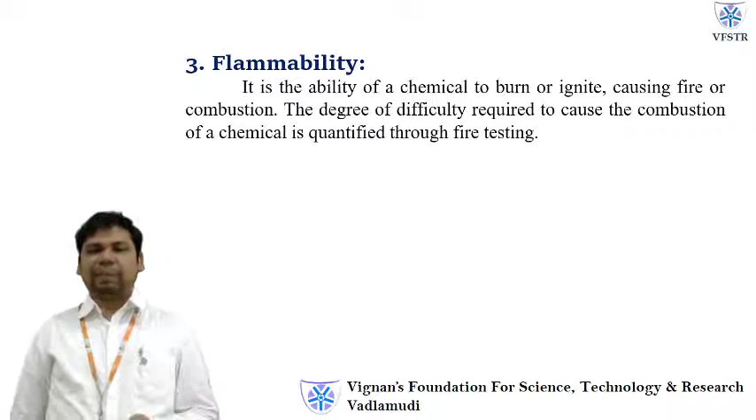Corrosion. As I mentioned about oxidation, here also it's the same thing. In the earlier topic we read about corrosion resistance. For example, when iron is exposed to seawater or the environment, it reacts with the water particles present in the environment and forms an iron oxide layer called rust. Rust formation is called corrosion. But our materials always require corrosion resistance, meaning rust formation does not happen. But the question here, as a chemical property, is which materials are corrosive.

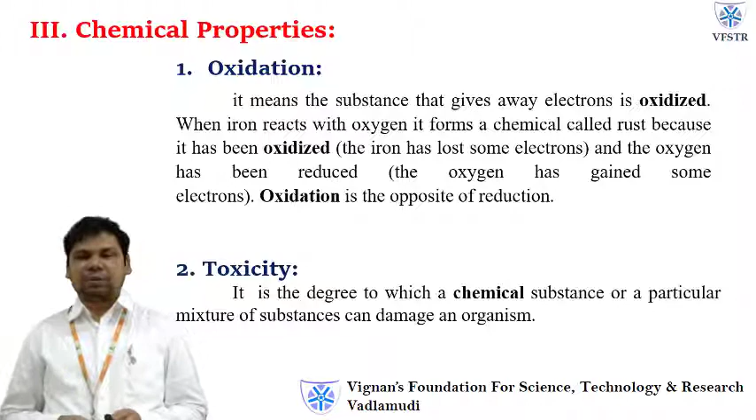So in the chemical properties, once again I will repeat, the four properties I am talking about here: one is oxidation, toxicity, the third one is flammability, and the fourth one is corrosion.

Now we'll talk about a different one, manufacturing properties. In industries, when materials are used, they will ask what properties they have. One of the properties is casting. What do you mean by casting or castability? In casting, the material is heated and becomes a liquid molten state, and this molten liquid is poured into molds and given some time to solidify. So the first step is heating the material into liquid state, then pouring it into a mold and waiting for solidification, converting liquid to solid. Finally, the finished product is nothing but a replica of the mold. That process is casting, and these are casting products.

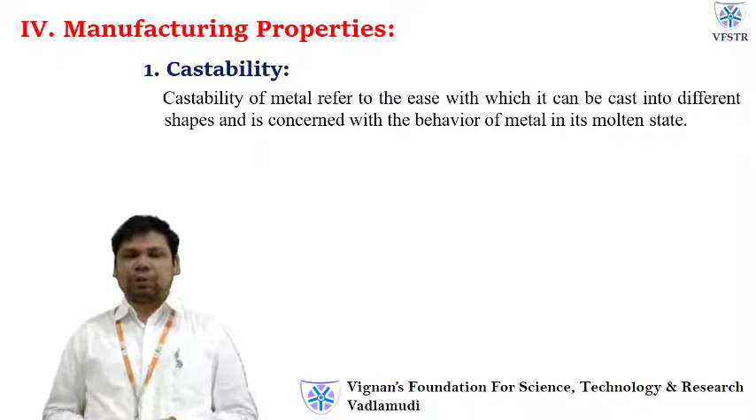Now, to decide which material is good for casting, the question is castability. Every material has a different castability nature. If it has good castability, the material in the liquid molten state is easy to move, and it is recommendable for that type of production. Similarly, machinability. Some materials are very easy and very good for metal cutting actions.

Say I have taken some material, and I have to remove some material here to maintain prescribed dimensions. I want to cut it. Whenever you are using a machine, the machine tool is going to cut. If it has good machinability property, then it is very easy to cut and make into different sizes and shapes comfortably. But some materials are very hard, so very difficult to work on.

So the question comes here, what about its machinability property? And this castability and machinability come under the manufacturing properties. Keep it in mind. Similarly, weldability: the name itself is weldability, the ability of a material to be good for the welding process. It is not possible for all materials.

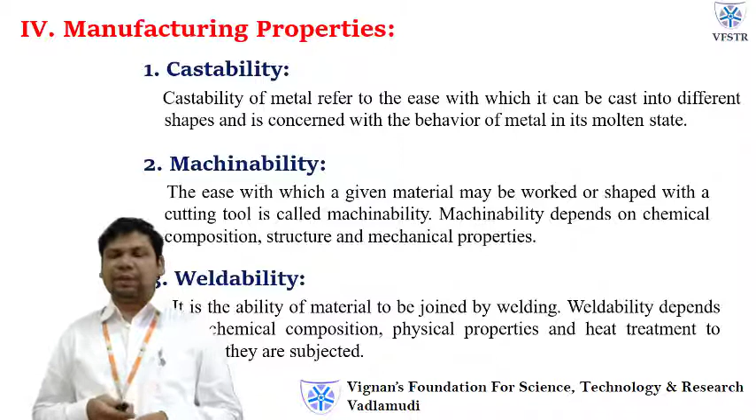Welding is nothing but a permanent joint. We give some type of heat energy. That heat energy melts at a particular localized spot and joins those two metal plates. So this is called general welding. Now here the question of weldability comes. Is every material welded similarly? No. Similar welding is not possible. A similar technique is also not possible. So those that are good for welding operations are said to have weldability properties.

Good. So the next one, electrical properties. So far I have completed chemical, mechanical, and manufacturing properties, about three. The next one is the electrical properties. Here the main field is electricity, the flow of current. Even if you don't know anything, you can generally say there is the flow of current, the resistance, the dielectric strength. You already studied these, I am just trying to remind you.

First one is conductivity. Conductivity is defined as the ability of a material to pass electrical current. That's it, its conduction nature. The current flowing means the electrons are flowing, which means it is a good conductor. Copper is a good conductor, and it is measured in per ohm per meter. Similarly, there is resistance. Resistance, as the name itself says, is completely opposite to conductivity. The resistance to the flow of electrons is called resistivity, which is measured in ohm-meters.

The next one, thermoelectricity. Here, thermo means heat. I am talking about two dissimilar metals joined together, maintaining two different junctions at two different temperatures. What will happen? It is nothing but a thermocouple in nature. So different types of materials are chosen for this thermocouple nature. The material is good for a thermocouple because it has good thermoelectric nature.

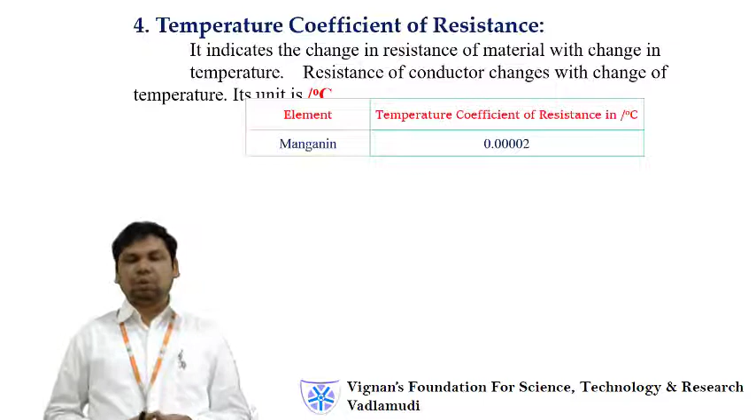The next one, temperature coefficient of resistance. I said resistance opposes the flow of current, but that resistance is also affected by temperature. The resistance of the material changes with temperature, which is measured per degree centigrade. For example, if I choose manganin from the table, it has 0.00002 per degree centigrade. That means for every degree centigrade, this much resistance changes. Every material has some value.

And finally, the last electrical property is dielectric strength. This is the ability of a material to withstand high voltages. Where there are high voltages, these materials are recommended to operate without any damage or failure of the systems. It is measured in kilovolts per centimeter. Materials with good dielectric strength are mostly used in transformers and power stations to transfer power. So this is it for the electrical properties.

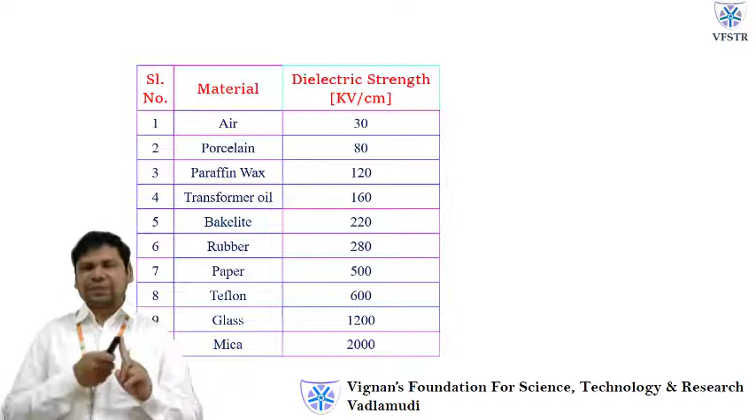And here is a table which gives the dielectric strength for different materials. The material may be air, glass, mica, or rubber, and how much the value will be. So don't think that electrical means only one property, one material. It's not like that. For each material, it is possible to address its physical, chemical, mechanical, manufacturing, or maybe optical nature. All these things we have to address. But for simplicity, we address only what your application requires.

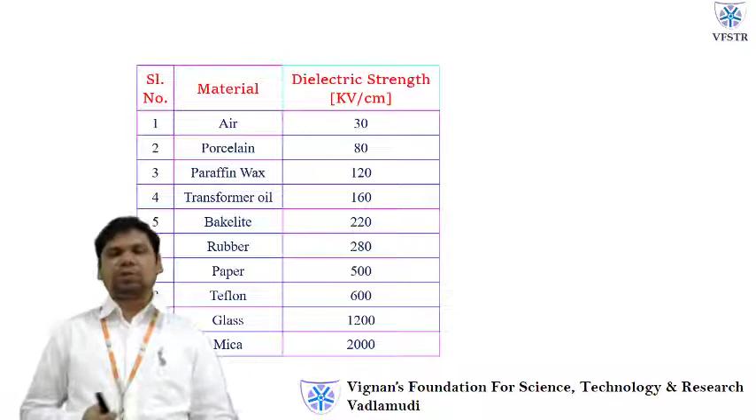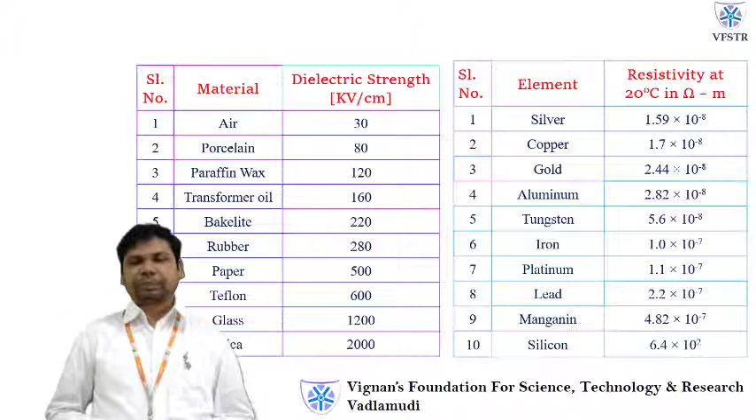The next one, the last category of the material properties, is the optical property. The name itself mentions optics. So the optical property of a material is nothing but the interaction with electromagnetic radiation in the visible form.

If you observe the electromagnetic waves from this diagram, they are available in different forms: radio waves, microwaves, infrared waves, visible waves. Visible waves means those waves which you can see. Radio and microwaves are not visible to us. Their frequency is different, their wavelength is different. So different types of waves are present, and the list is shown in the diagram.

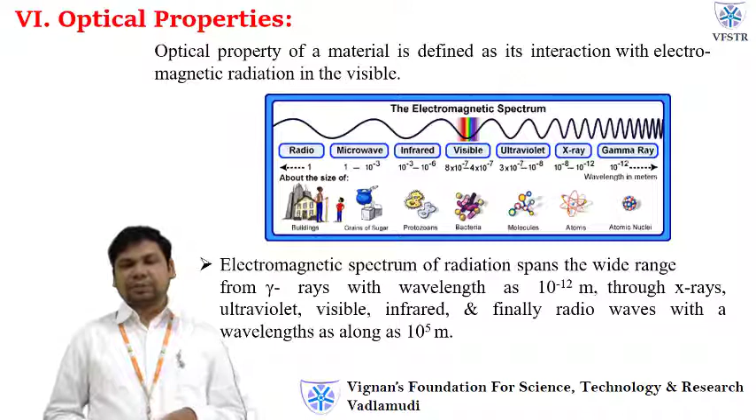There are gamma rays, X-rays, ultraviolet rays. Each one has a different frequency and a different wavelength. Now, we are talking only about the optical property here. In the electromagnetic spectrum, the radiation spans a wide range, from gamma rays with wavelength 10^-12 meters, through X-rays, ultraviolet, visible and infrared, and finally the radio waves, which have 10^5 meters of wavelength.

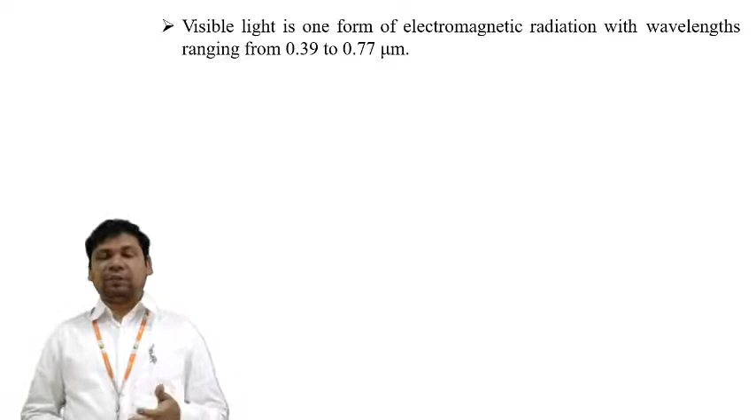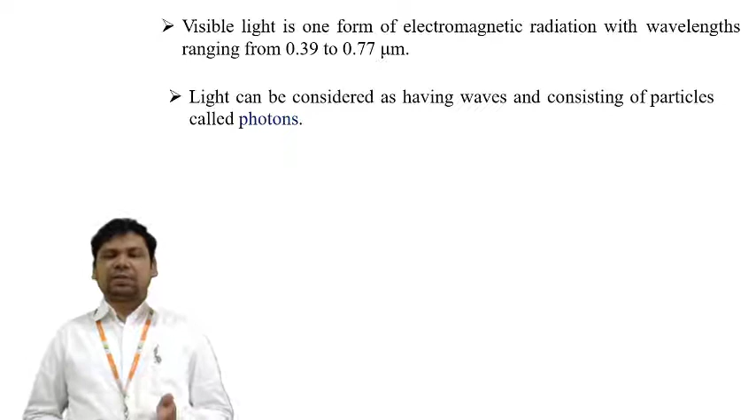Now, one important point: the range of wavelength for visible light is 0.39 to 0.77 micrometers. The main thing is light can be considered as waves and as particles, which we know are called photons.

When light rays come in contact with the material, there are three possibilities: transparent, translucent, or opaque. If a material allows the light rays through it, it has a good transparent property. Translucent means it allows the rays, but only partially; some part goes out. That is called translucent.

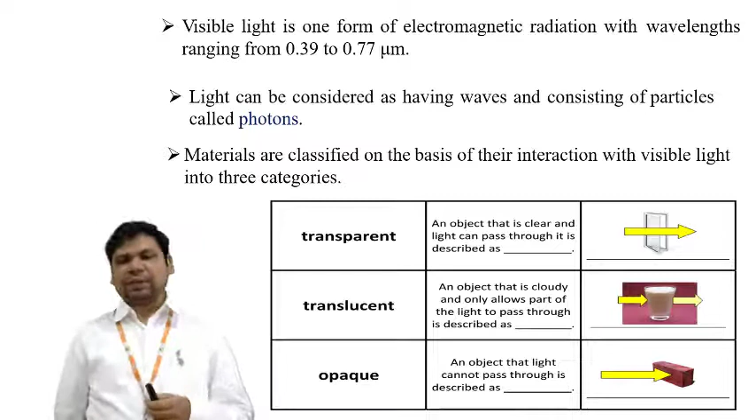Opaque means light is not possible to go through. Like the brick shown here, which resists the flow of light. No light can transfer inside the material. Those are opaque. So these three are also properties.

Here I'm giving you a small exercise. This diagram shows opaque, translucent and transparent. The question may be: what are the examples for each? From the diagram, what do you understand? Try to give the examples.

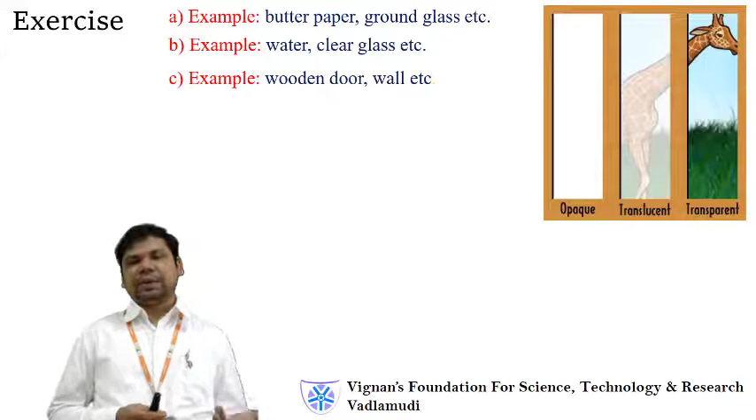Butter paper, ground glass come under what type of property, of the three conditions: opaque, translucent or transparent? For example, a wooden door, a wall, which category? Water and clear glass come under what property? Not only these three properties, we'll talk about some other properties now.

One is absorbability. The name itself is absorb. Light can be absorbed inside the material. Almost the same amount that is incident on the material is absorbed; that is called absorbability. Transmitting, the name itself mentions transfer: simply passing the light rays to the other side. It's called transmitting.

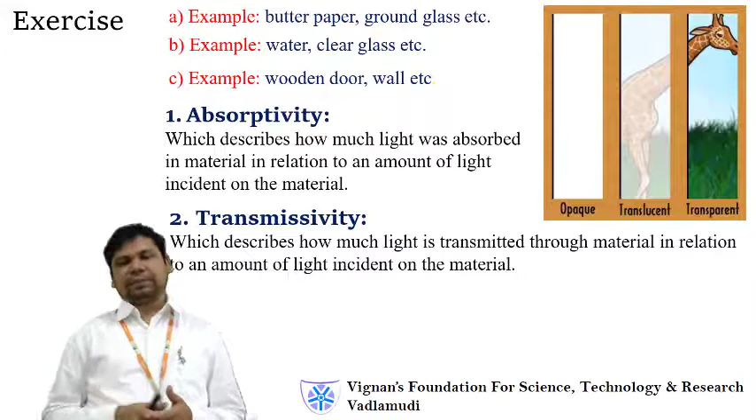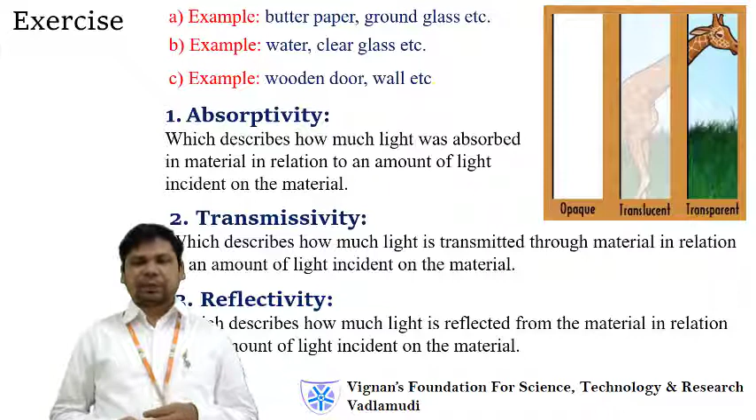The next one is reflection. Reflection is about the material reflecting rays in another direction. Whereas transmissivity means light goes through the material, reflection means it is reflected towards the other side. So these are the three properties. Another one, refractive index.

So the index indicates the scale, and every material has this refractive index measured. It is defined as the ratio of the velocity of light in vacuum to the velocity of light in the metal or material. This is called the refractive index.

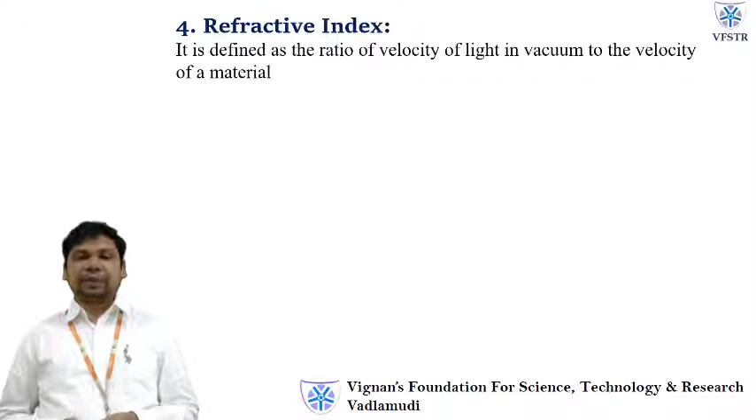Similarly, emissivity. It describes how much light is radiated or emitted from the material in relation to that radiated by a black body. Of course, the temperature condition will be the same. That means emissivity is measured with reference to black body radiation. So that is called emissivity. It is a ratio, a constant.

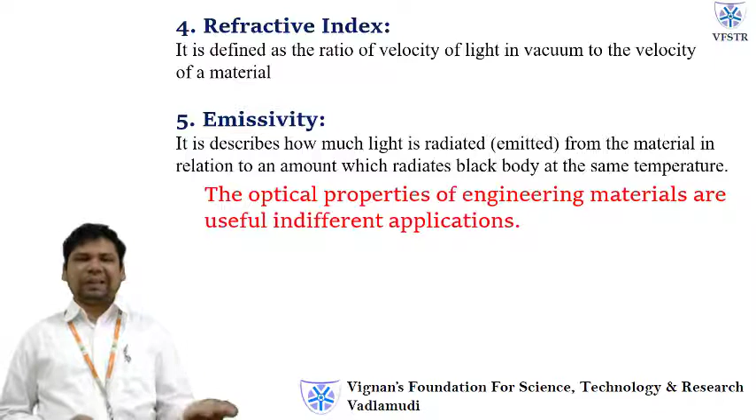So here, when you're talking about all these fields, maybe in mechanical, you can use any applications, like from an automobile point of view. So physical, everything will come. Similarly, the optical properties also play a major role. And here I'm simply giving some examples of that.

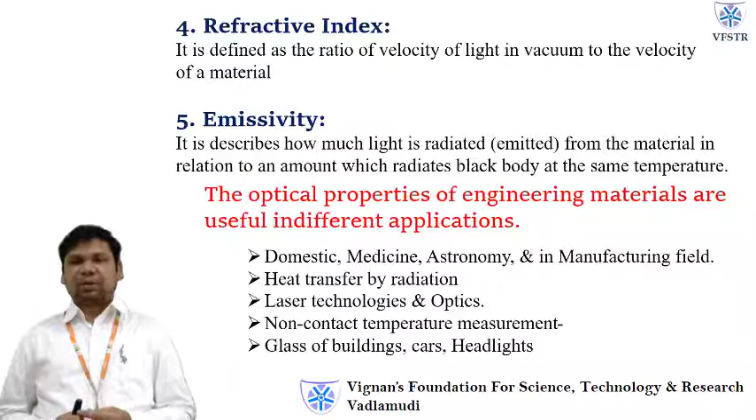So whatever you are using in the domestic, medicine, or manufacturing field, heat transfer, radiation, optics, laser technologies, there may be non-contact temperature measurement. That means for temperature measurement, no need to contact that body. With these light absorbing properties of materials, we are measuring its temperature. Right?

Pyrometers are one such device which can measure temperatures, very high temperatures. So glasses in buildings, cars. In all these applications, these optical properties are going to play a major role.

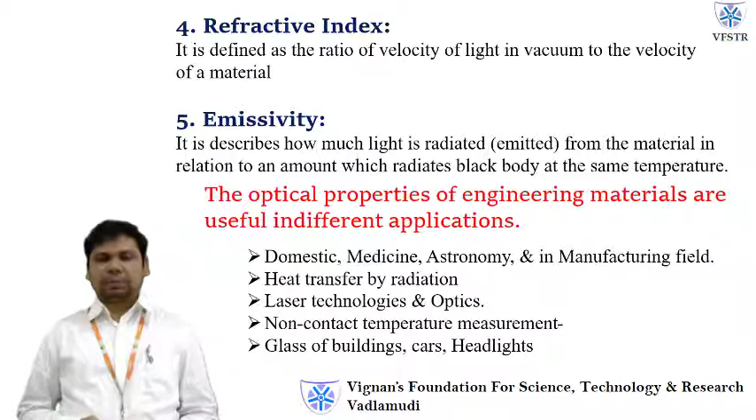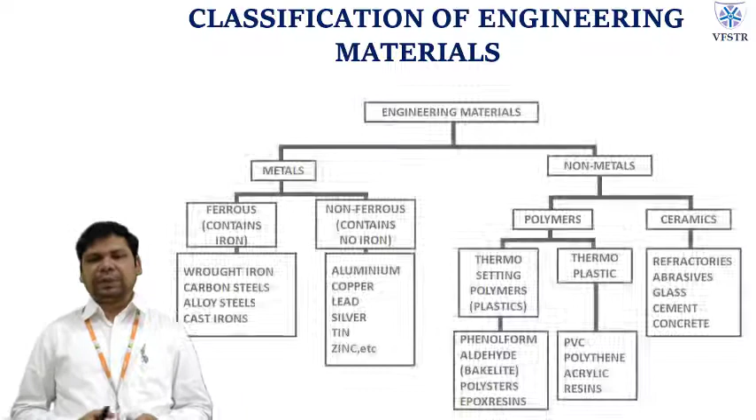Now, I'm just giving an idea about engineering materials. Already you are familiar with engineering material classification, the metals and non-metals, ferrous and non-ferrous groups. But what I want to mention here is that for every material there is a possibility to think about its property. It may be a physical, mechanical, chemical, electrical, or optical property. Of course, manufacturing also comes. Not only this, some others will be there.

So when you are familiar with all these properties, only then are you in a position to decide what material or what properties are recommended for your application. Once you decide which properties are required, for any material you select, just compare its properties, then you can decide whether it is suitable for your application or not. This is how engineers work.

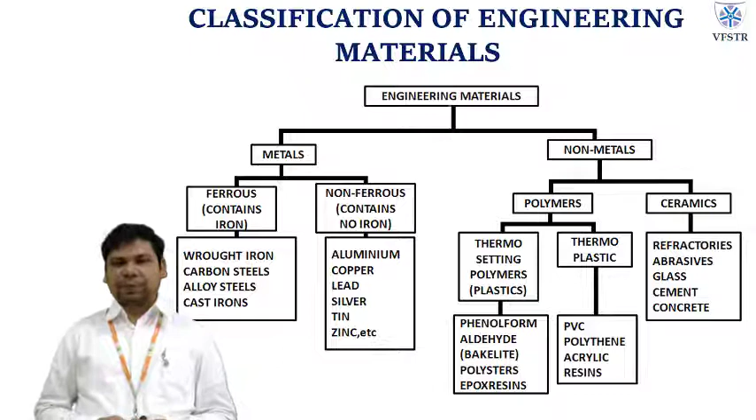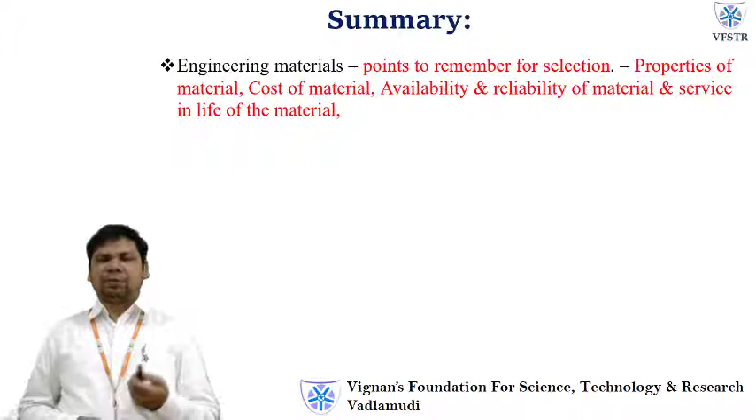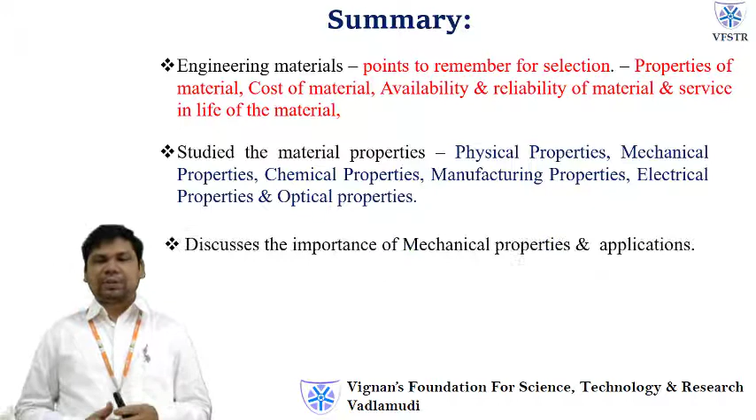So finally, I'm summarizing here. So far, I've talked about engineering material properties and more particularly the points for selection of materials. The points for selection mean the material cost, availability, and its service. The next one is the study of material properties. I already mentioned all these different fields of material property study, and some applications where I simply addressed the mechanical properties. This is it for today.